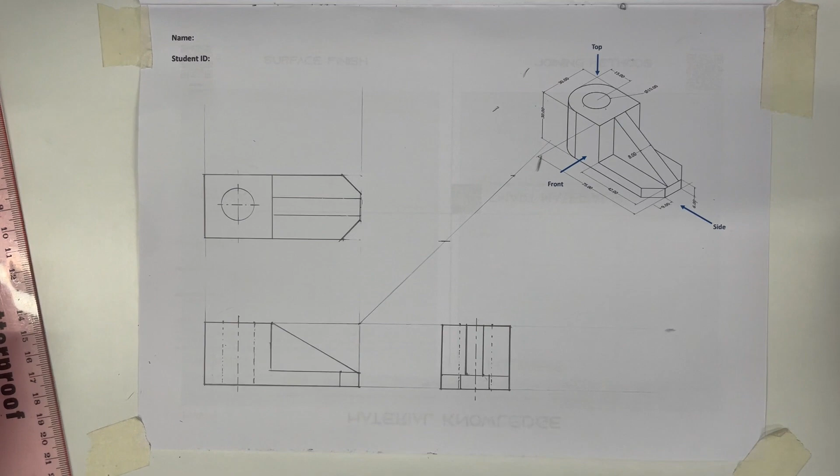This video is about adding dimensions to your orthographic drawing. You can see the dimensions all shown here. They aren't usually shown on the isometric, they're usually shown on the actual orthographic. So on the orthographic, the dimensions aren't usually duplicated. They're usually just shown once, if you've got the width here.

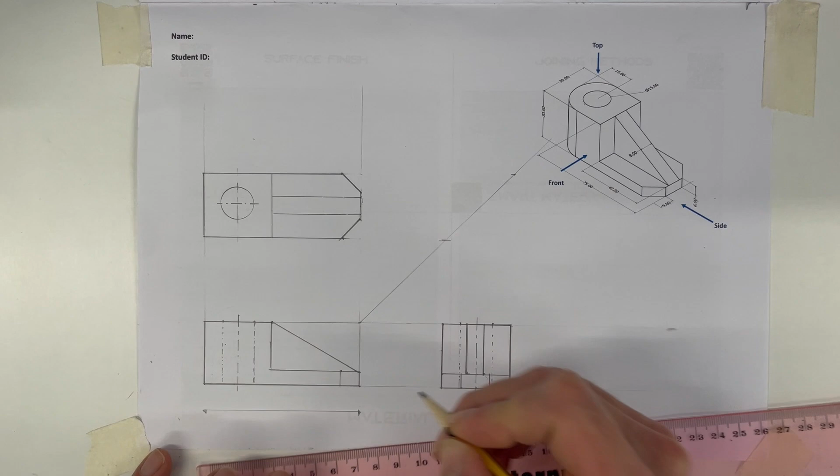So let's go, this would be a sensible one to put the width on. I would start about here and do this as a line and an angle with some arrows on it, and then put in the dimension. You don't have to write millimeters every time, as long as somewhere at the top it says all dimensions in millimeters. Then I would go inside the outer dimensions for the smaller ones.

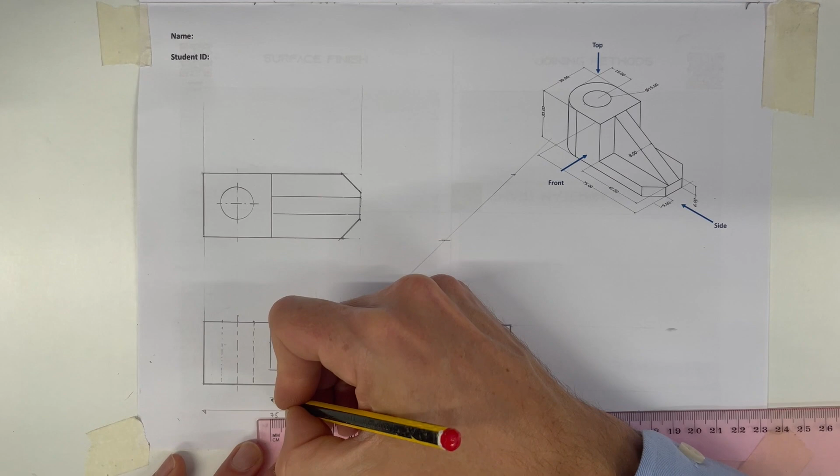And if you're only doing two, they should be equally spaced apart like this. And then that would be 42. In fact, I'm pretty sure the dimensions should be on top.

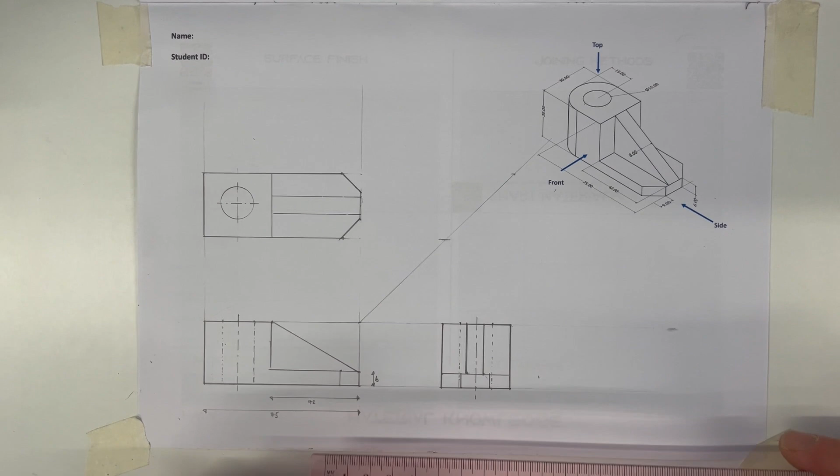And here, equally spaced apart, you'd put maybe the height. That would be a good one for the height there, of 6 millimeters. Instead of putting this one here as 9 millimeters, you might put that here roughly at the same height again, so we're showing that as 9 millimeters, and that is looking at the front here.

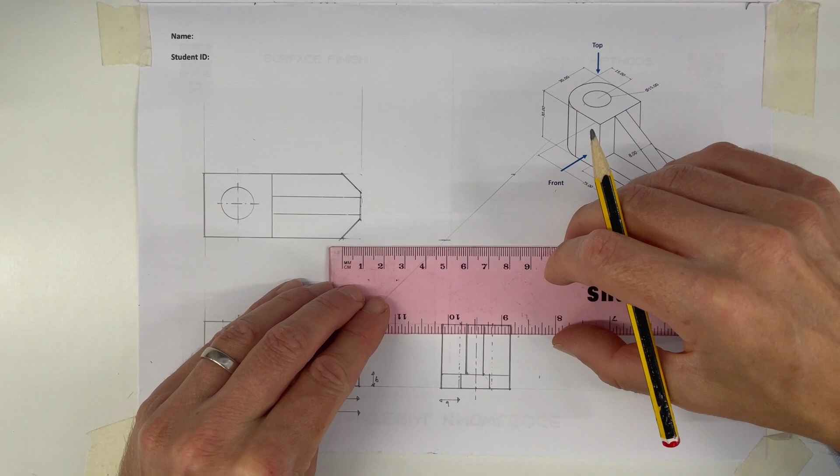You might also put it over here, looking this way. I know it doesn't show it on the other side, but generally you would have it shown all across.

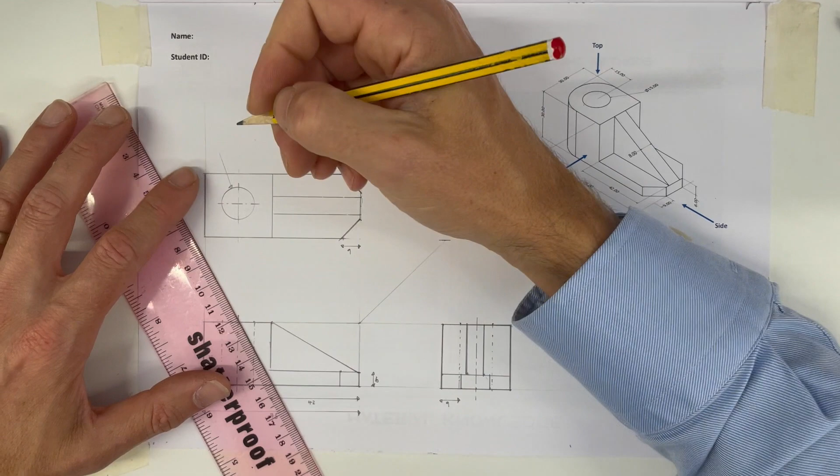Now, for things like the circle, generally you could dimension the circle here, but it's easier for us to see it dimensioned off of here. So you're going to put a line here like that with an arrow to it. Sometimes it goes all the way through, but as long as you write the symbol for diameter, then you can just put that in as 30.

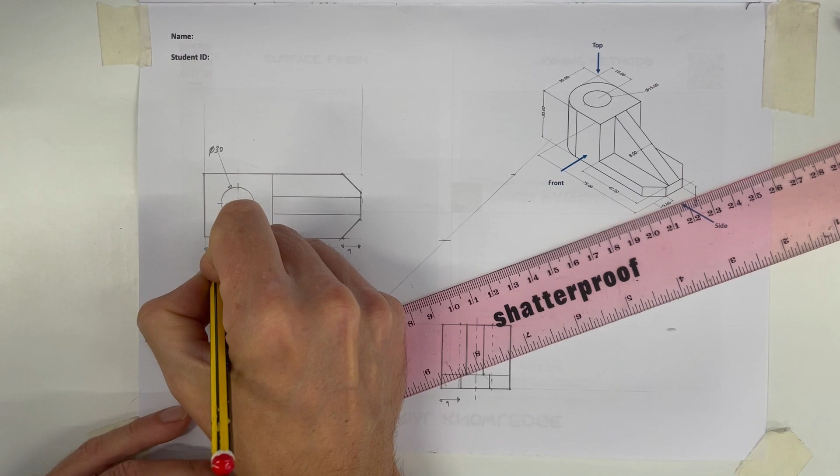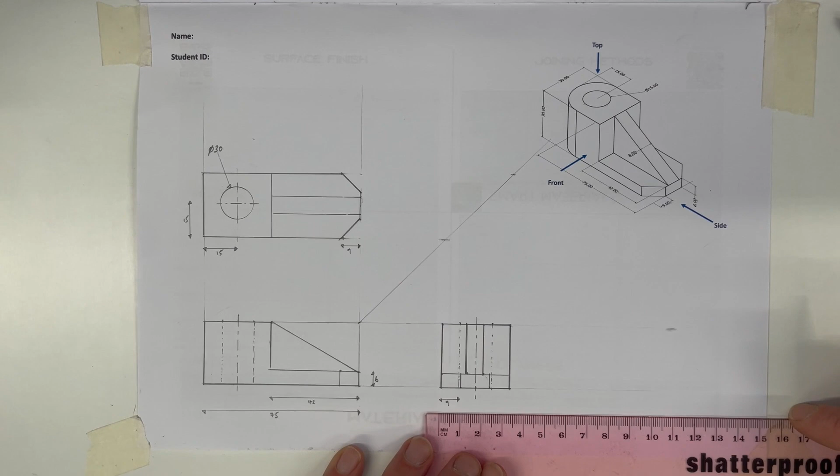And then here you might just put in the dimension of how far away from the edge that is, so we can put that in as 15. And then you want to do the same here, as 15. We haven't written the thickness of it, which you could do here, or you could do on this side. This one's only got one on it, so I'm going to add it here in line with this line, just to make it nice and neat.

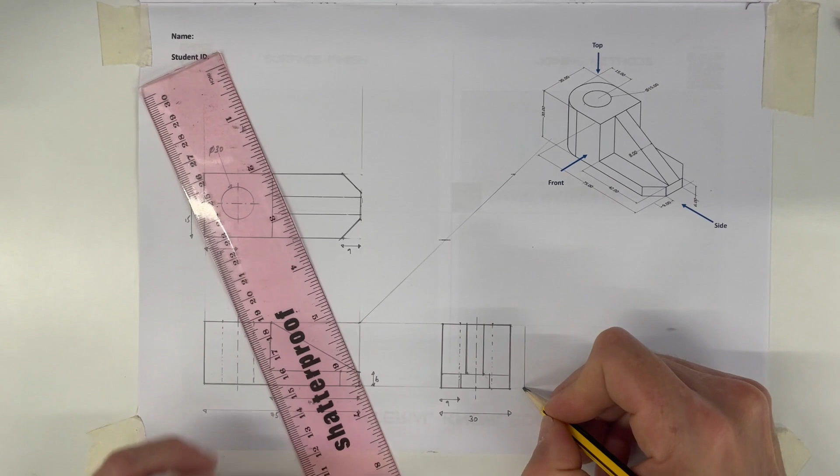All dimension lines should go on the outside of the drawing. So this is 30. We haven't got a height yet, so it could be here, or it could be here. I'm going to put it on this side over here like that, at 30. So it's 30 along, 30 this way. That's how to add your dimensions.

There may be some that are missing. You can keep going, working out what they should be. You could add an angle here, but we don't need to because we've measured up the height and the other side, so it doesn't need to be on there. We've got the 6, which is the height here, so I think it's almost done.

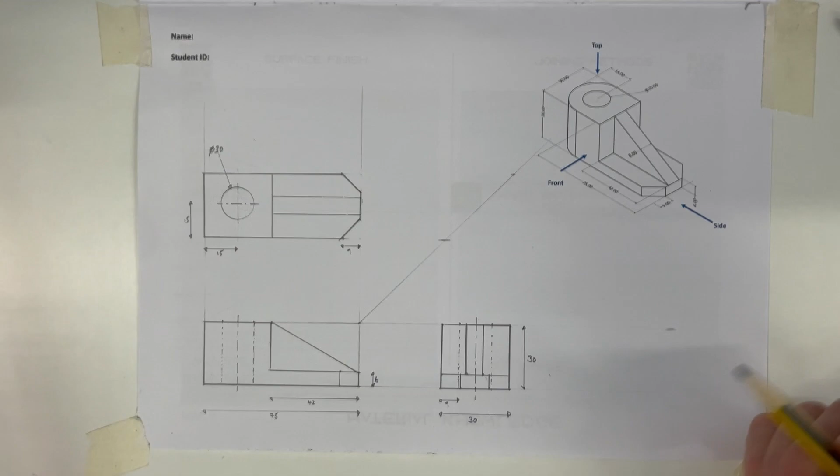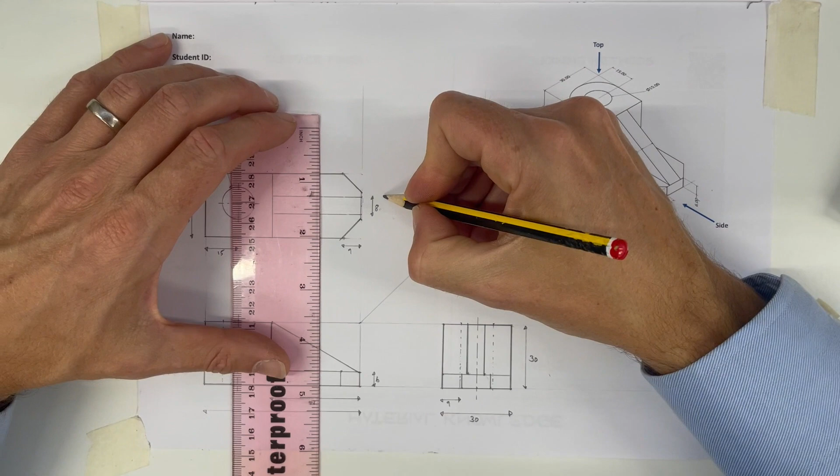Maybe this dimension here we haven't added, as 8 millimeters, like that. You don't necessarily need to write millimeters there, but you either want to write it or you don't, so don't mix it up. And then maybe you might want to add in a dimension just to show that it is in the middle here, or exactly how that's written.